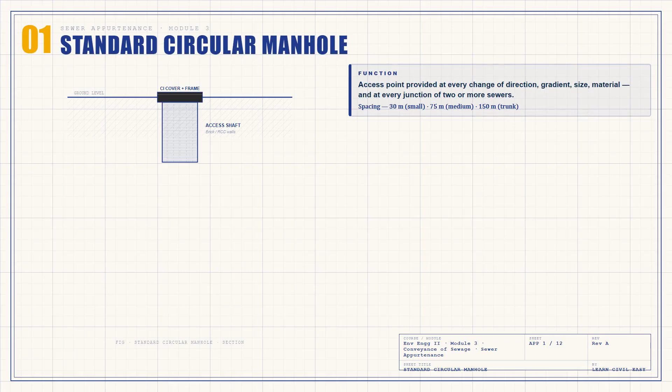This is the standard circular manhole, the most common access point in any sewerage system. We provide a manhole wherever the sewer changes direction, gradient, size, or material, and at every junction of two or more sewers. Spacing is 30 meters for small sewers below 0.9 meter diameter, 75 meters for medium sewers, and up to 150 meters for trunk sewers.

The key dimensions you must remember: the cast iron cover has a clear opening of 560 millimeters as per IS 1726. The access shaft is 600 millimeters in diameter. The working chamber below is 1200 millimeters in diameter, with a minimum height of 1.8 meters.

Step irons are 20 millimeter diameter, spaced 300 millimeters center to center, with the first step not more than 450 millimeters below the cover. The benching slopes at 1 in 6 and the half-round channel matches the sewer pipe diameter.

For maintenance, inspect the cover and frame monthly, remove silt from the channel, repair any eroded benching, and always test gases with a 4-in-1 detector before any worker enters. Remember, no man entry is permitted if the sewer diameter is below 0.9 meters.

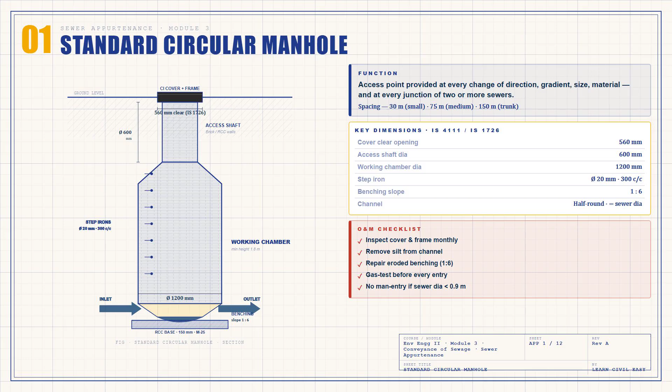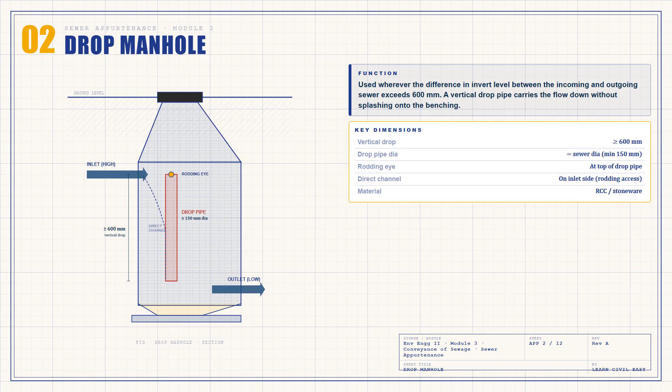The key dimensions: the vertical drop must be at least 600 millimeters. The drop pipe diameter equals the sewer diameter with a minimum of 150 millimeters. A rodding eye must be provided at the top of the drop pipe so a flexible rod can be inserted for clearance. And importantly, a direct open channel is also provided on the inlet side for rodding access and flow gauging in case the drop pipe blocks.

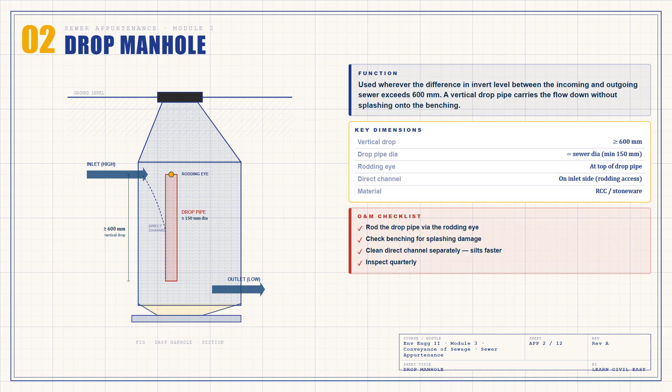For maintenance, rod the drop pipe via the rodding eye, check the benching for splashing damage, and clean the direct open channel separately as it silts faster than the drop pipe.

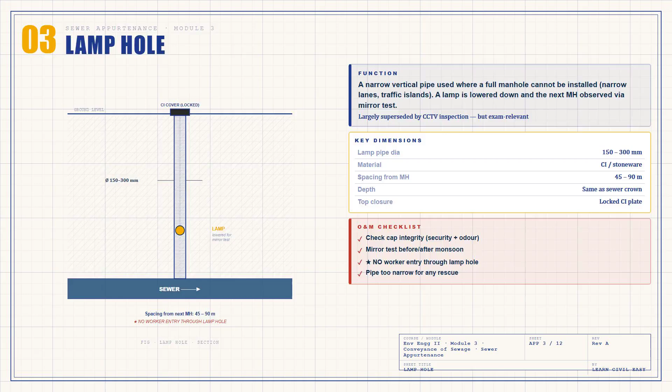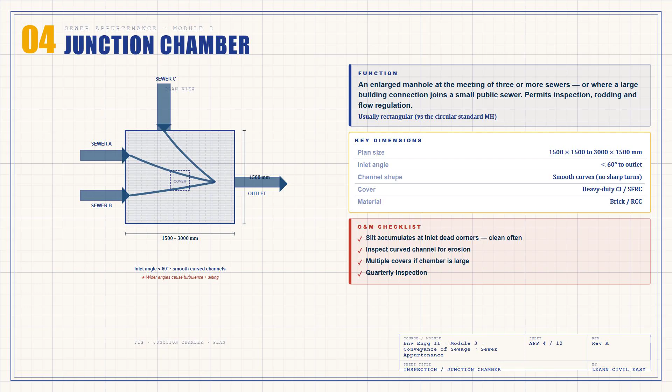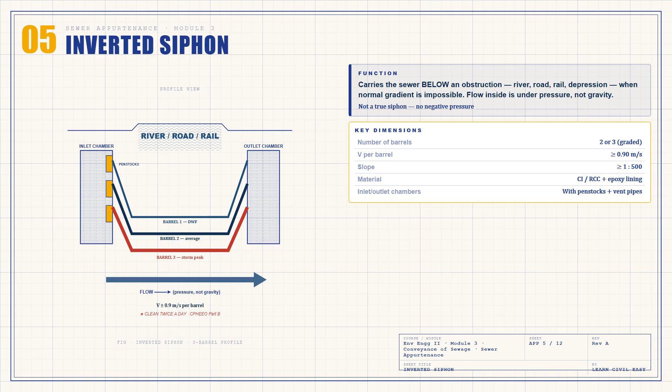The critical design feature is multiple barrels of graded diameter. Dry weather flow alone is too small to reach the self-cleansing velocity of 0.9 meters per second in a single barrel. Barrel 1 is sized for minimum dry weather flow. Barrel 2 cuts in at average flow via an overflow weir. Barrel 3 handles peak storm flow.

Inlet and outlet chambers have penstocks, so any one barrel can be isolated for cleaning. Vent pipes at both chambers release gas buildup. And here is the most asked exam point: inverted siphons must be cleaned twice a day, as per CPHEEO Manual Part B.

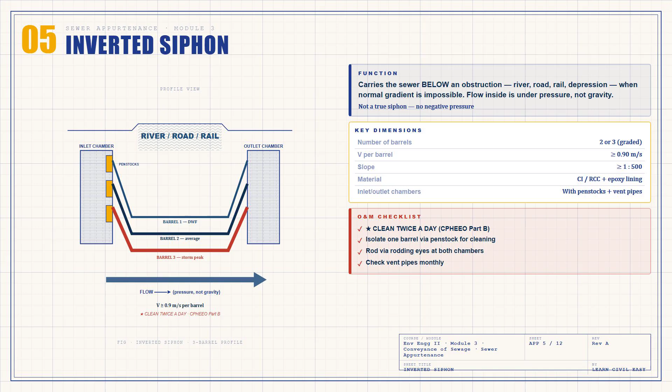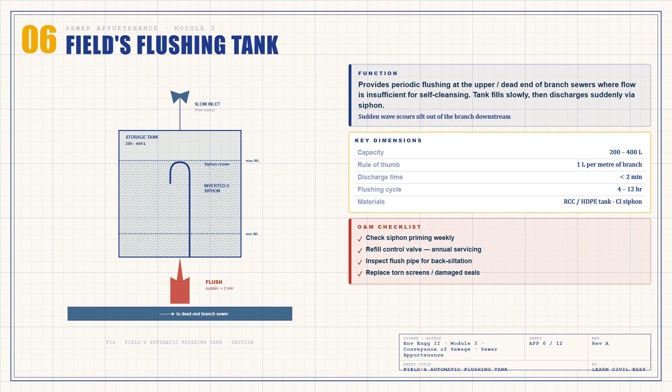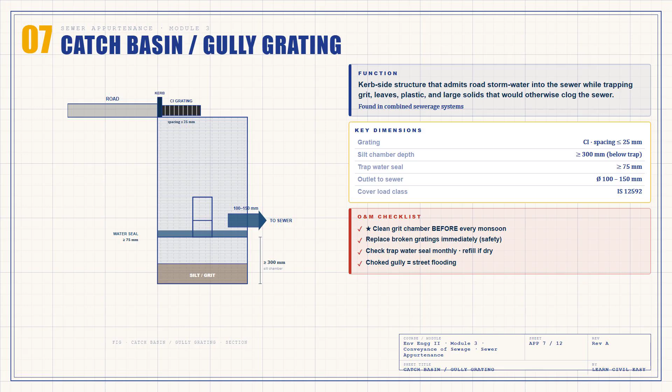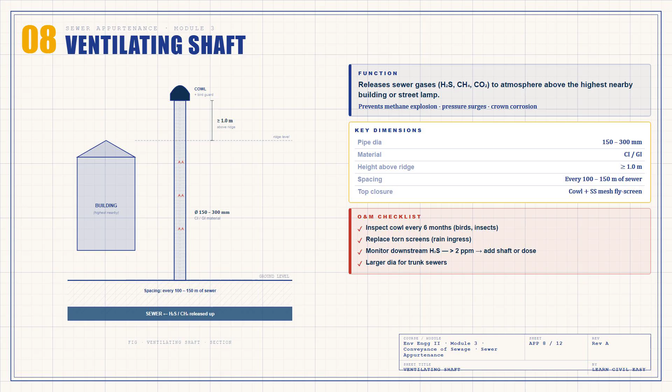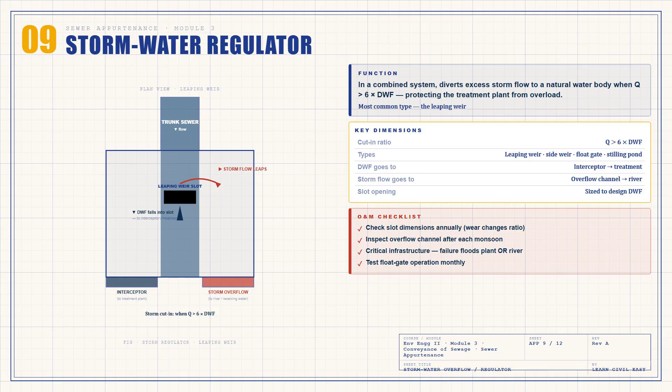Inspect the overflow channel for debris after every monsoon end. The regulator is critical infrastructure. A malfunctioning regulator either overloads the treatment plant or sends untreated sewage to the river.

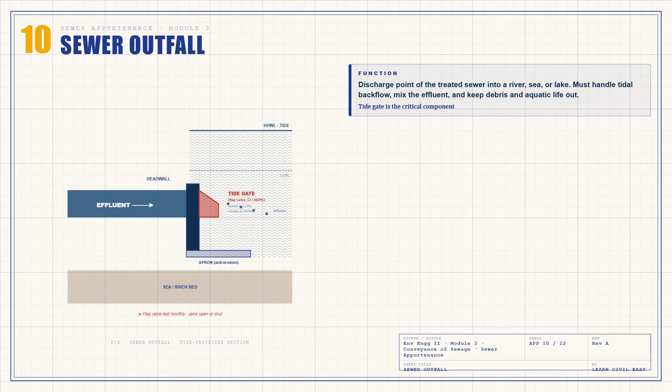The sewer outfall is the discharge point of the sewer after treatment into a receiving water body: a river, sea, or lake. The design must account for high tide or flood backflow protection, proper mixing and dispersion of the effluent, and protection against debris and aquatic life entering the sewer.

The key feature is the tide gate, also called a flap valve, made of cast iron or HDPE. The flap opens outward at low tide to allow effluent to discharge and closes automatically against backflow at high tide.

Other components: diffuser ports distribute the effluent over a wider area for mixing. A screen keeps fish, weeds, and debris out of the sewer. A head wall and apron resist erosion and uplift. For sea outfalls, a marker buoy warns shipping.

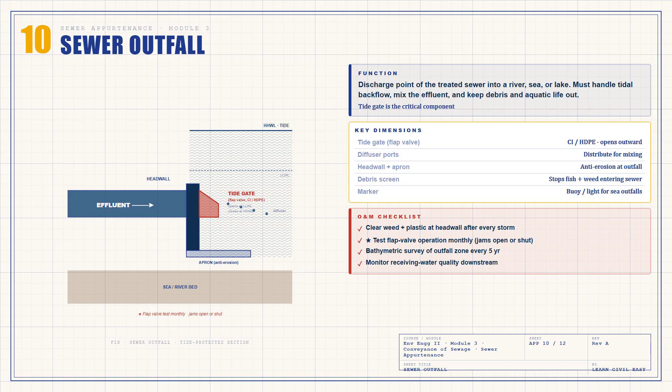For maintenance, clear weed, silt, and plastic at the head wall after every storm. Test the flap valve operation monthly. They jam open or shut due to debris or corrosion.

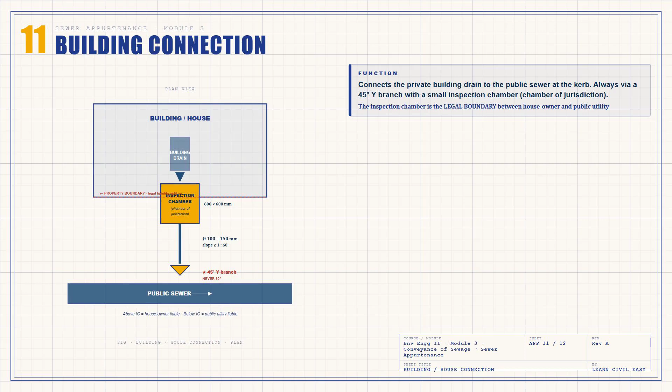The building connection is the sewer that connects a private building drain to the public sewer at the curb. It always uses a 45-degree Y branch with a small inspection chamber called the Chamber of Jurisdiction. This is the legal boundary of responsibility between the property owner and the public utility.

Key dimensions: connection pipe diameter is 100 to 150 millimeters, made of stoneware, RCC, or HDPE. The slope is at least 1 in 60 for self-cleansing at low flow.

The branch into the public sewer is always at 45 degrees, never at 90 degrees, because a 90-degree junction causes turbulence and backflow. The inspection chamber is 600 by 600 millimeters located at the property boundary.

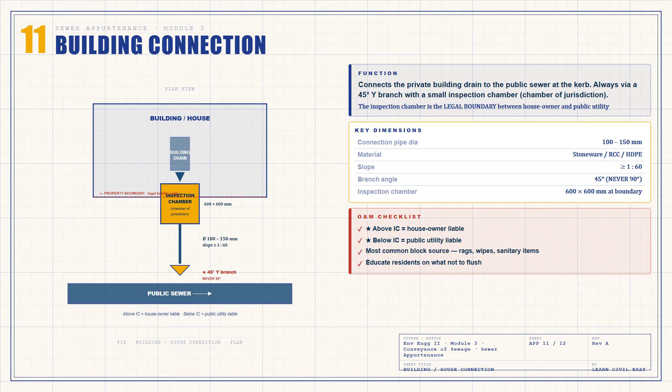For maintenance, the public utility is responsible downstream of the inspection chamber. The house owner is responsible upstream. The most common block source is householders flushing rags, wipes, and sanitary items.